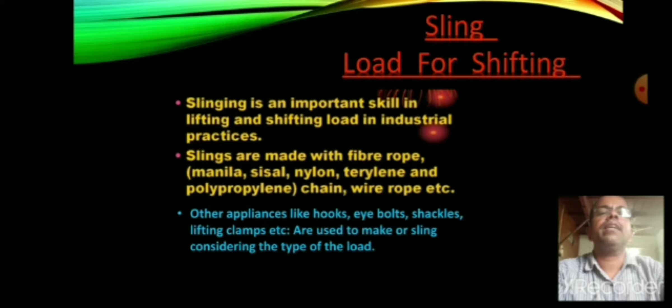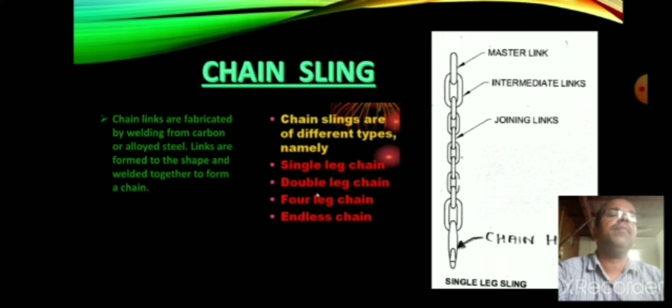Chain slings are of different types, namely single leg chain, double leg chain, four leg chain and endless chain. In the figure, the sketch is a single leg chain sling, and its parts are shown. The upper one is the master link, the next is the intermediate link, then the joining links, and then the chain hook.

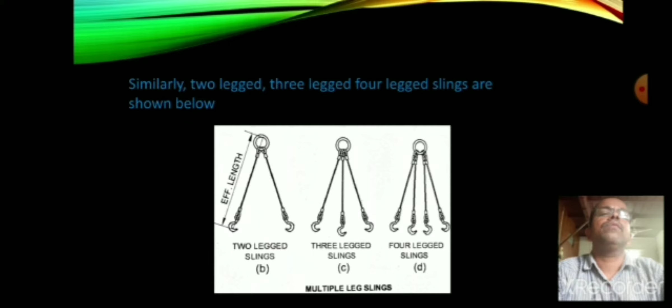Similarly, two-legged, three-legged and four-legged slings are shown below. The first one, B, is a two-legged sling. C is a three-legged sling. The last sketch is a four-legged sling; these are multiple leg slings. The effective length is given from the center to the end hook. So similarly, 2 leg, 3 leg and 4 leg slings are shown below.

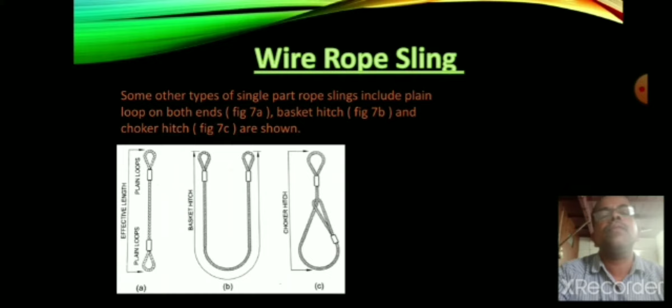Some other types of single part rope slings include plain loop on both ends. In figure 7A it is shown, that is plain loop on both ends. Both ends you can see there, plain loop. And B is basket hitch. It looks like basket type, U shape. And the last one is choker hitch. So you can see there the first one, figure A. I will enlarge it a little bit.

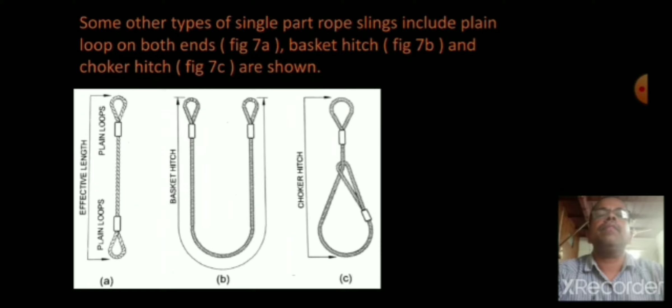Plain loop you can see there. Both are same. Some other types of single part rope slings include plain loop on both ends. You can see both ends are the same. That is why it is called plain loop. Then B is a basket hitch. You can see that basket U shape, it is a basket hitch type. Another one is a choker hitch. You can see how they have put the notch channel there. That is wire rope sling.

Fiber rope sling should be used only for lifting and shifting lighter load. Fiber rope means not wire rope. Fiber is a little bit softer material. So that is used only for lifting light material. Light loads you can lift by fiber rope. Heavy weight you have to go for wire rope. So that's why the first point is given: fiber rope sling should be used only for lifting and shifting lighter loads only.

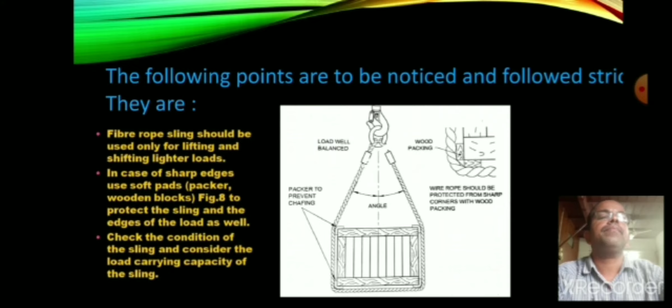So some more points are there. Ensure about the safe working load. You have to see that your work is in safer condition. Okay, that's why it is given a safe working load. SWL means safe working load of the chain and wire rope sling. You have to follow safety precautions. That's why skill is required when lifting heavy loads, so that you yourself avoid getting harmed. So ensure about the safe working load of the chain and wire rope slings.

Then chain should not be twisted for sling. Chain should not get twisted. Suppose if it gets twisted, when you are lifting, suddenly it will open up. So you should be very careful. See that the chains are not twisted. So chain should not be twisted for slinging.

Then avoid formation of loop in the wire rope slings, which will lead to damage. You should avoid that. If there is any formation of loop, it will be a big problem. It will lead to damages. So you should avoid formation of the loop. See that it is straight. If there is any formation, you should not use that.

Avoid riding on the load. You should not ride on the load. Suppose if it is lightweight and you think you can ride on that rope, you should not do that at all. It is very harmful. So be far away from that. Avoid riding on the load.

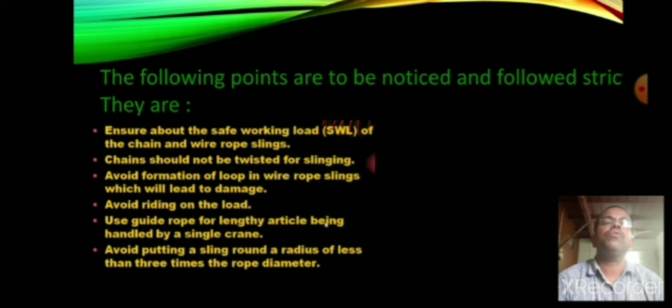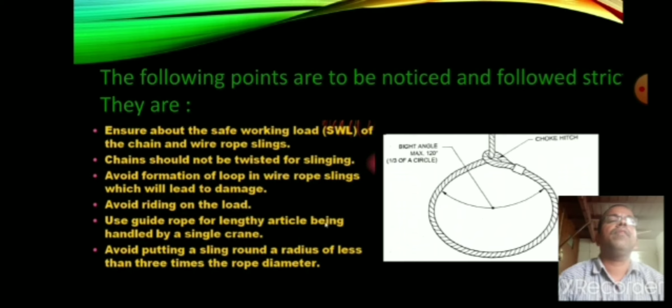Avoid putting a sling around a radius of less than 3 times the rope diameter. Here one sketch I have shown you. You should avoid putting a sling around a radius of less than 3 times the rope diameter. Here one sketch also I have shown. The bite angle should be maximum 120 degrees. Some more points I have given in the next page.

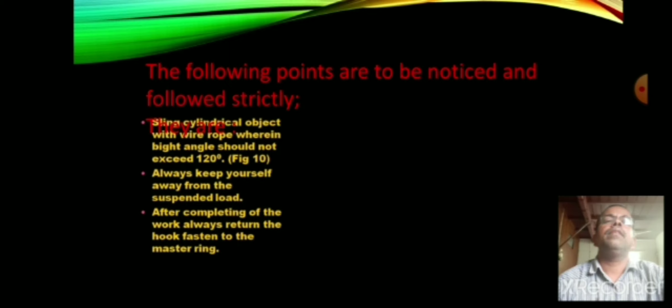Then always keep yourself away from a suspended load. You should not stand below that load. If you stand a bit far away, it is good enough. So don't stand nearby. Whenever you are lifting up or carrying away the load, you should be far away from it. That is a safety precaution.

Then, last one: after completing the work, always return the hook fastened to the master ring. After completing or unloading the load, you have to remove that hook and keep it in a proper way. From the master ring, you have to remove it, dismantle it and keep it. So those are the safety precautions you have to follow when using this sling.

So I hope you have understood this lesson. I will continue this chapter in the next class. Thank you.